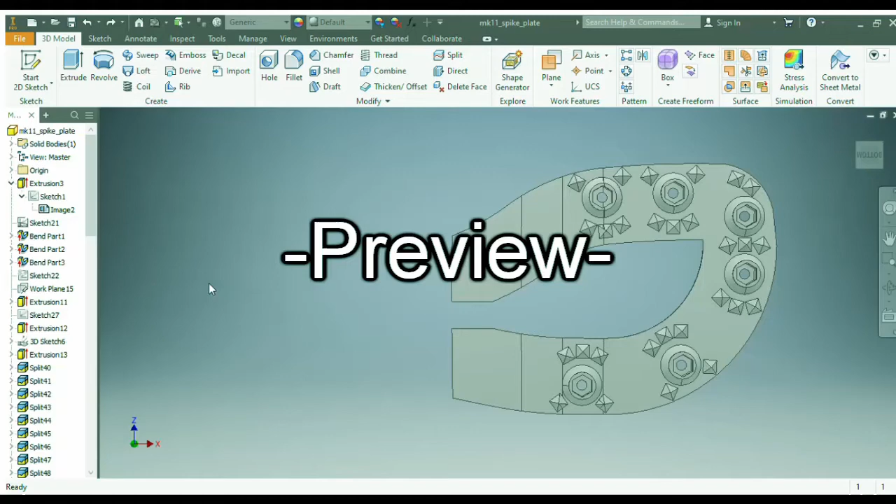Most spike plates do extend past the metatarsal heads, even for long distance spikes. In this episode of Building My Own Track Spikes, I'm going to show you how I designed the spike plate of the shoe. Now the spike plate is just a piece of plastic on the sole that connects all the spikes to the shoe. So let's go check out the 11th design I've put together in 3D modeling software.

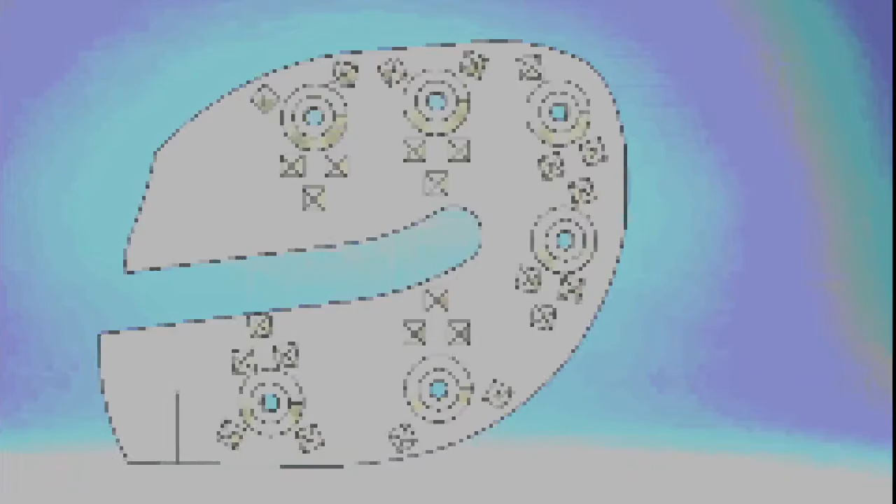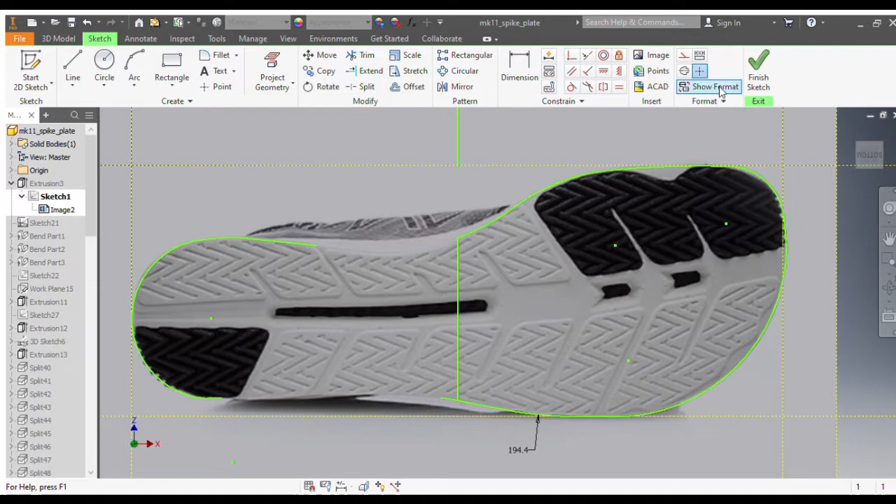Okay, the first feature, the first design choice is this is a half-length spike plate. Now here you see I've traced out the sole of the Altra Vanish R, which is just an Altra racing shoe. And as you can see, it extends about halfway through the foot. So the actual profile, once it's cut out, it will extend about halfway through my foot. Most spike plates do extend past the metatarsal heads, even for long distance spikes, and this will just increase the effective rigidity by a little bit.

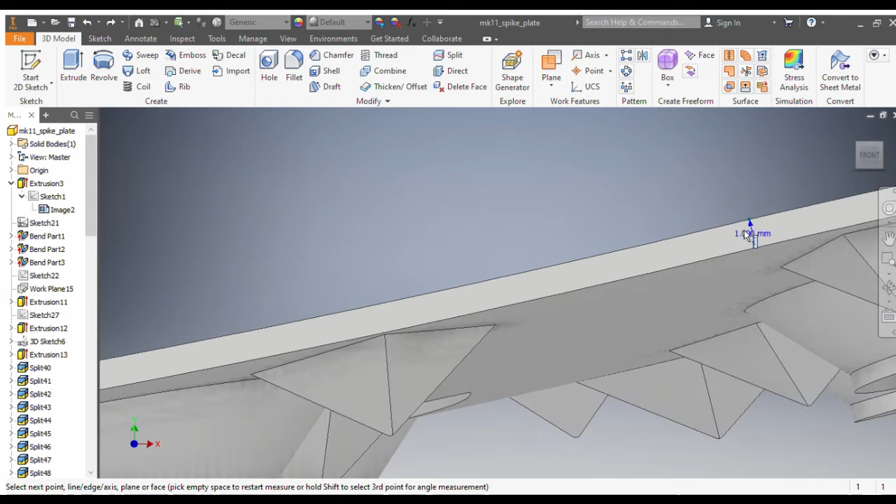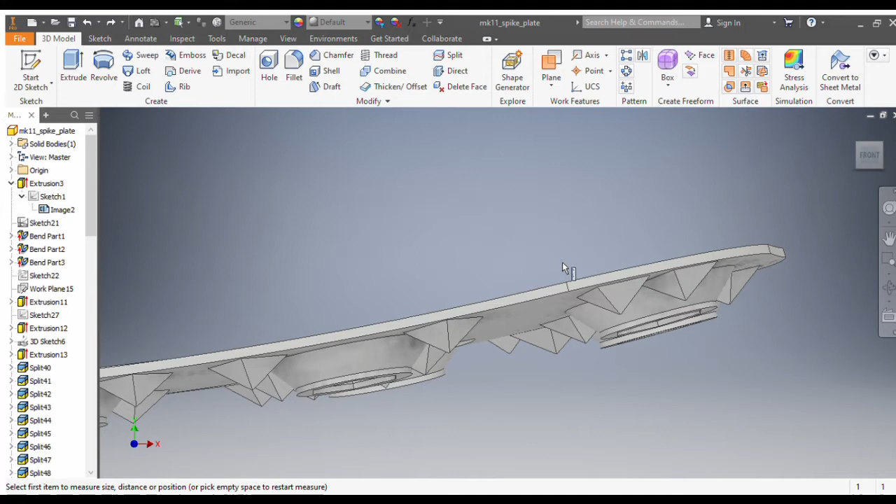The other feature of this is the base of the plate is 1 millimeter thick. This will be the part that bends the most when I flex the foot, and a thickness of 1 millimeter is about the right balance of rigidity and flexibility for PLA material at least, and similar for nylon material. If I made it any thicker, the plate might be a little too rigid, or it might break more easily. And if I make it thinner, then it won't be rigid enough.

The other feature is the 6 spike receptacles. Now, this should be good for holding 6 spike pins. And that's typical of a shoe that's good down to 800 meters. I do want this shoe to perform at 800 meters pretty well.

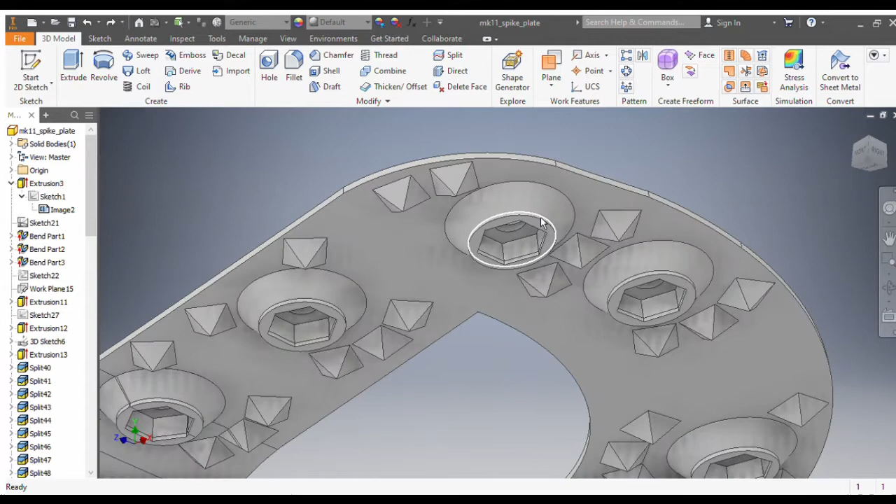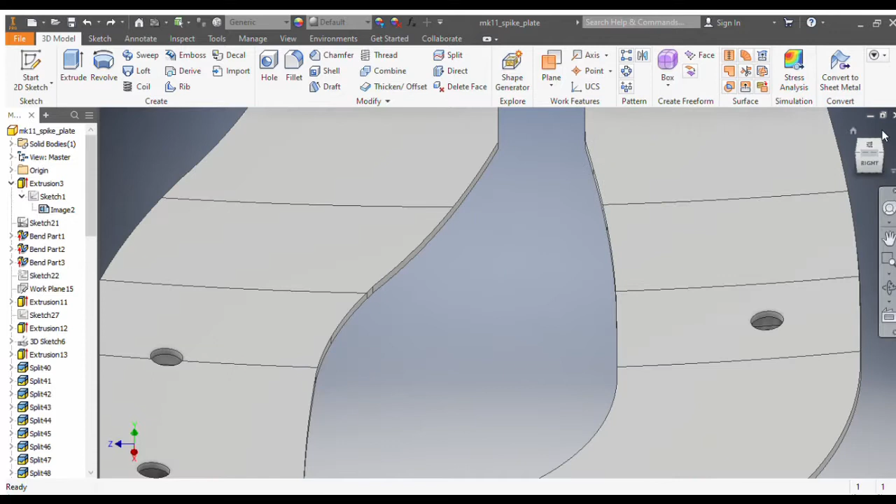And the actual receptacles for the nuts that the spikes go in, they are thicker than the rest of the plate because the actual screw threads extend more than just 1 millimeter in thickness. And I can't have them extending out to the other side of the plate like this, because then they would just pierce the bottom of my feet. It's better to have a flat plate or a mostly flat plate, or else I would probably get blisters with the protrusions eating into my feet.

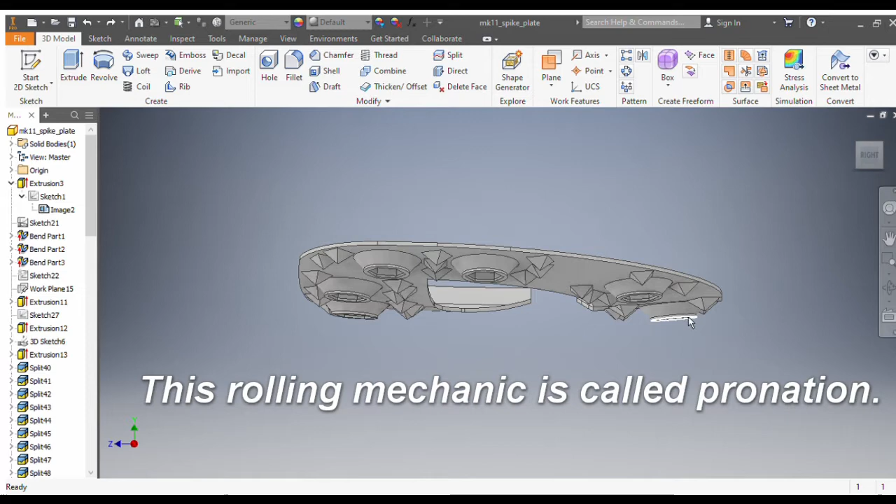The other feature is how there's a slight curve from one side to the other. This will just increase the smoothness as I transition from foot strike to toe off. And when people run, they'll land more on the outside of the foot and roll to the inside. So it's rounded just a little bit to accommodate for that rolling. And this rounding is present in most spikes, so I figured that'd be a good feature to implement.

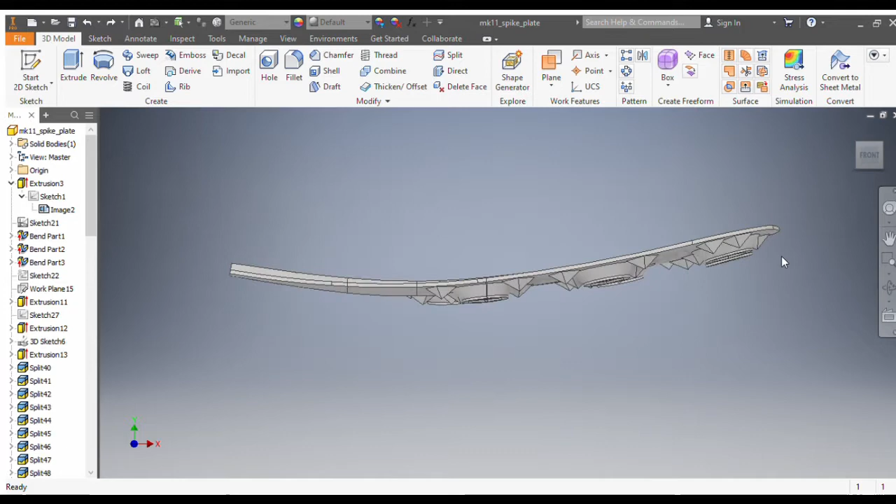It's also curved from front to back. It'll cause that toe up kind of posture, which is prevalent again in a lot of track spikes. And it's supposed to put you up on your toe.

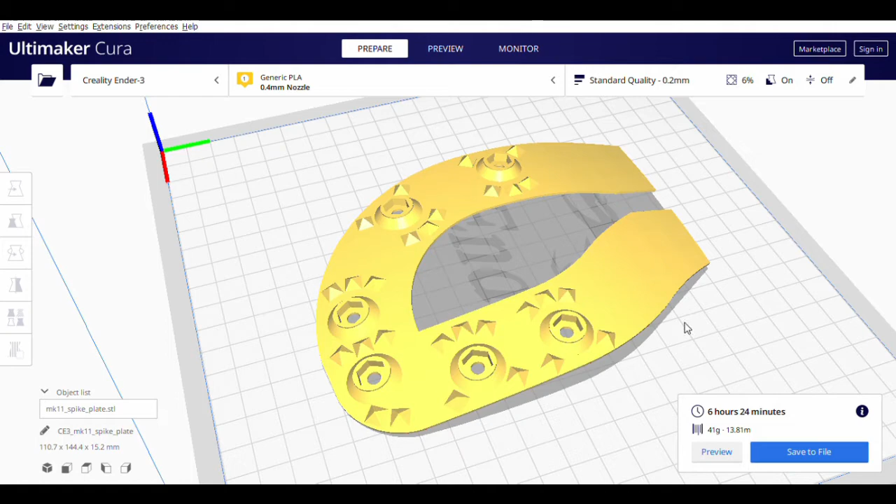So the last feature is the horseshoe plate design. This horseshoe design is present in some spike plates, namely the Nike Matumbo and maybe some others. What this will do is it'll increase flexibility by just a little bit. The main reason I wanted it is so I didn't have to print support material under this whole section, because due to its curved shape, the plate needs to be printed with a lot of support material underneath it.

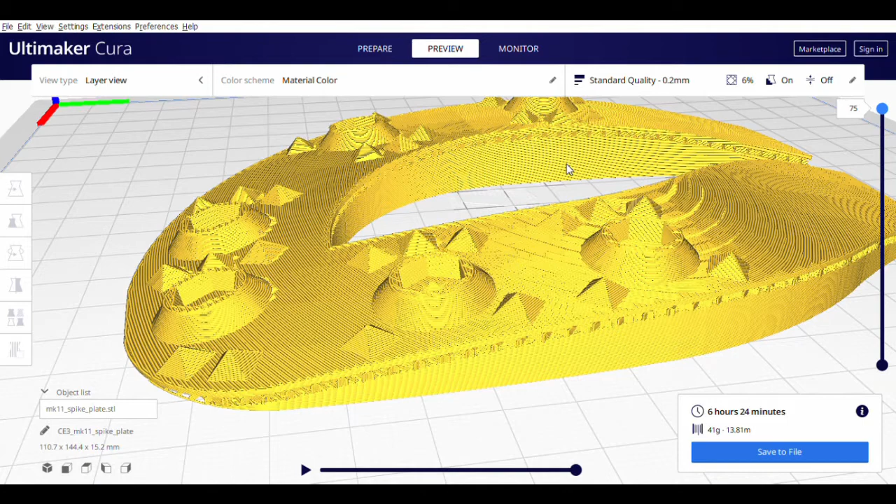So this saves a lot of print time and material by completely omitting this center section. It'll still take 6 hours, 24 minutes to print, but it would probably take at least 2 hours longer if I left this section filled in.

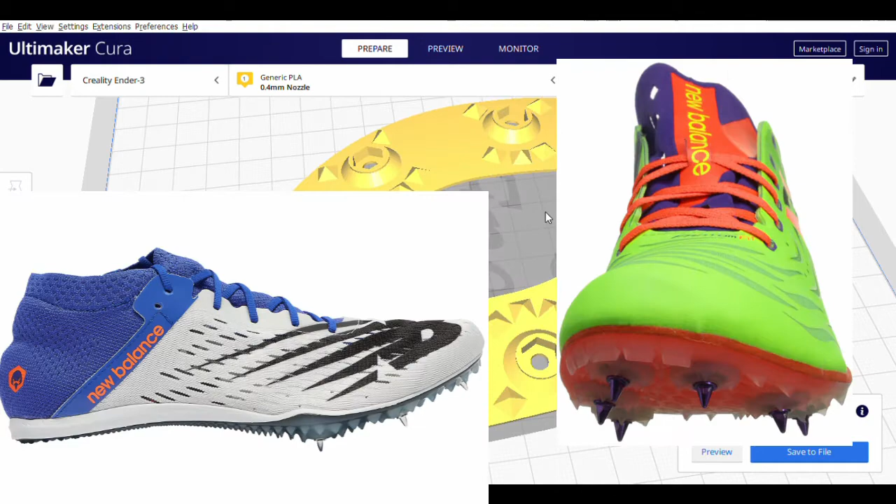So I've made these design decisions based off of what I've seen in a lot of spike plates, particularly for mid-distance and distance spikes. I've looked at the Nike Zoom Victory 3 a lot. I've looked at the New Balance MD800, which was my favorite spike in high school. And just the things I've learned looking at them, I figured they would be good to apply when I was designing my own plate.

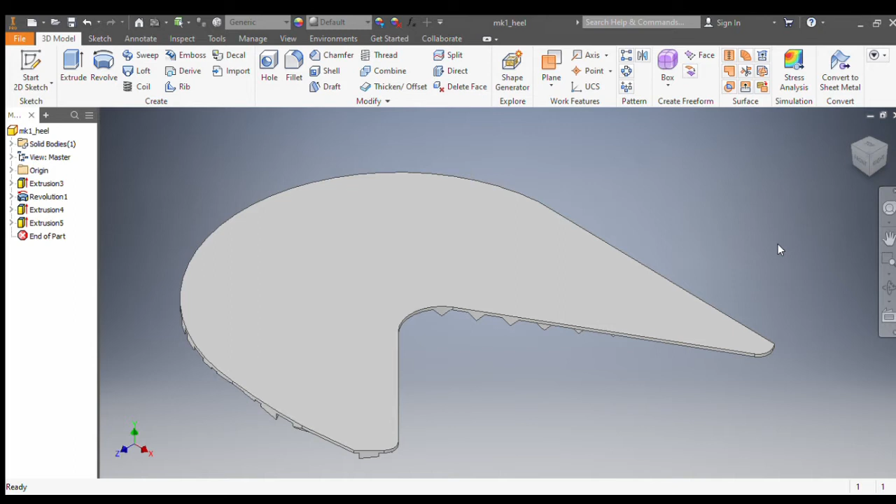I do also need something under the heel. I can't just leave the heel foam exposed. Pretty much all non-sprinting spikes always seem to have something at the heel to add a little more traction, as well as to protect the foam. This heel traction consists of a thin layer that's 0.4 millimeters thick. That'll account for at least 2 layers of 3D printing, and the reason for this layer is just to provide a good surface to glue to the foam.

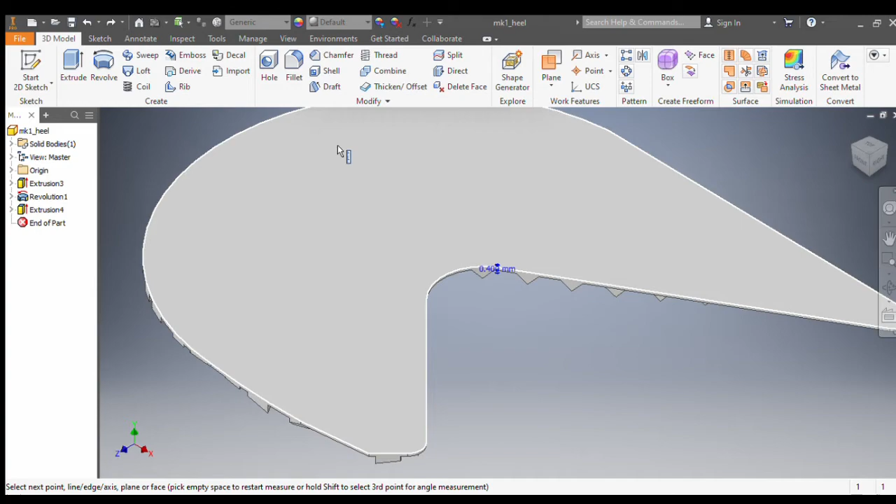And on the other side, we have this pattern of traction. All these little protrusions or teeth are just going to grip the track a little more when my heel is touching the ground, even if it's not for that long.

Okay, I'm going to print the spike plate and the heel section, but until then, I'm going to show you the progress I've made on a wearable pair for a prototype. I've cut out a couple new soles and started shaping them up. So that means this is the first time I'm making an actual pair rather than just one shoe.